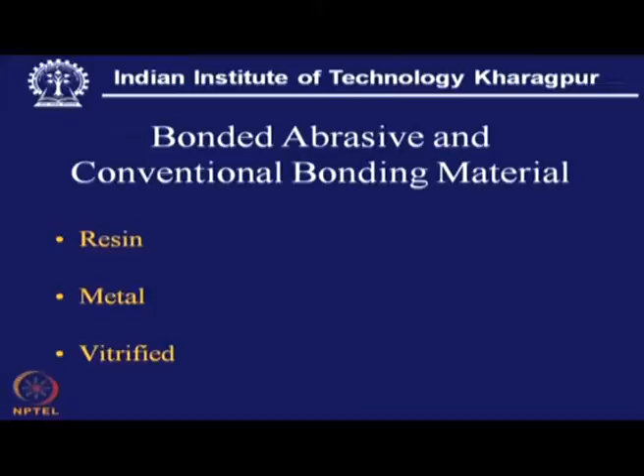The basic requirement comes from the application of this abrasive in manufacturing. These abrasives are actually bonded abrasives, held against a metal support with some bonding agent, required so that the abrasive material can be very efficient and high performing.

Classically, these abrasive grains, in order to take on the task of material removal, are suitably bonded by conventional means: metal bond, resin bond, or vitreous bond. These are actually very old ways of realizing an abrasive tool.

However, the limitations of conventional bonds were soon realized. To make this wheel, we need a mold, and this molding gives the shape of the form, followed by what we call curing, sintering, or firing, depending on whether the bond is resinoid, metal, or vitreous.

When we have to use a mold, we have no other option, so flexibility becomes rather small. This flexibility can be understood in terms of geometrical flexibility on the wheel surface—any form on the wheel surface cannot be easily realized by this molding process. So shape and size are restricted by this technique.

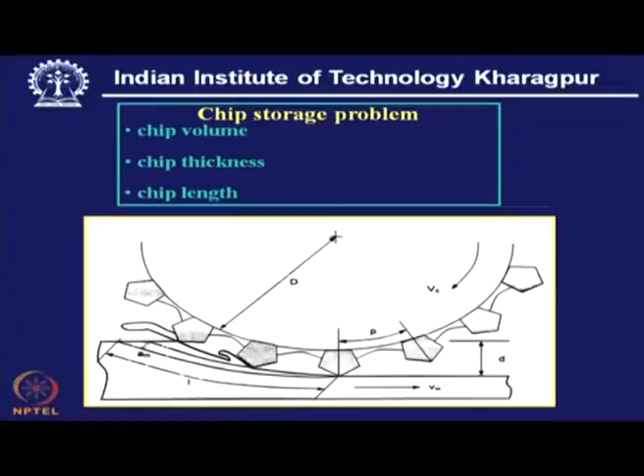However, to overcome this difficulty, one can go for a monolayer abrasive tool, which offers a solution to the aforesaid problems just highlighted.

There are two ways of doing this: either electroplating technology or active brazing technology. By adopting one of these, either plating or brazing, one can realize this abrasive tool with a monolayer configuration. Each has its own merit and weakness.

If we look at this process of making the wheel, one can see that these grits are actually anchored on the wheel surface, which is a metal capable of working at very high speed.

This material is chosen such that its capability to withstand centrifugal tension or stress is quite high, almost like a material chosen for the high speed rotor of a turbine, and this material can be well suited to make even the abrasive wheel rotor.

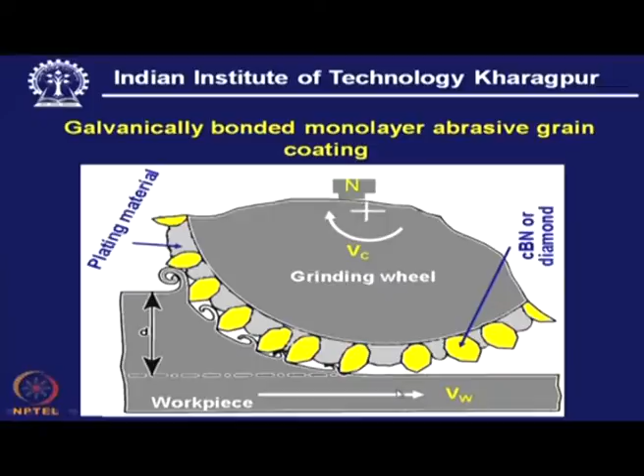Over this we have this bonding layer, and in the bonding layer these grits are anchored—just like a galvanic or electroplated bond around each crystal. We can also look at the brazed version, where the material is brazed over the surface.

However, though it has some salient features and very special advantages unmatched by any other technology, it is still not free of limitations. One of these limitations we can immediately see is the relatively high processing temperature.

Now, this high processing temperature means if the size of the wheel is quite large and has some non-symmetry in its geometry, then holding the accuracy and precision of the geometry by the post brazing process, or even during brazing, will not be a very easy task. The whole brazing cycle has to be controlled with utmost care, but still geometrical distortion at the level of a few tenths of a micron cannot be ruled out.

So, this is going to be one of the major issues which has to be addressed. And relative high processing temperature means there can be a little bit of metallurgical damage to the wheel base, that means the core material, which also needs proper rectification, that means grain refinement or some post brazing treatment. So, this is just not free of any problem.

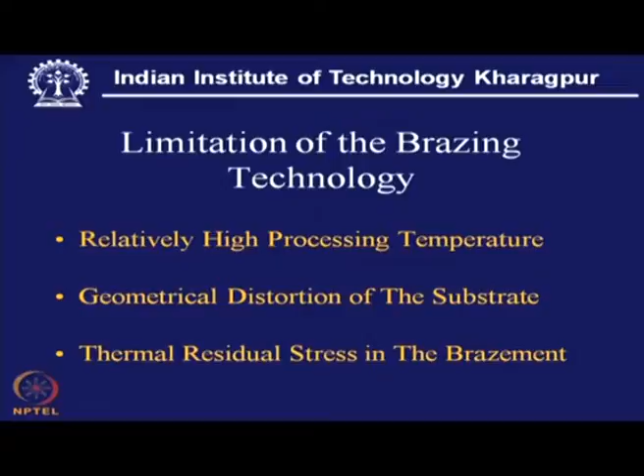And then, most importantly, the thermal residual stress - this is a very important issue one has to care for. It can be illustrated by this simple sketch. This is one grit, this is the second one, and they are being supported by the substrate material, and here we have the braze alloy.

And this braze alloy, by effective wetting, will give this shape. So, that is one of the special features of brazing. This area will be shrouded, covered by the braze alloy, and here this part is exposed. Now, what happens during cooling of this brazing alloy?

This is the grit, this is the braze alloy, and this is the substrate. Now, during cooling, the braze alloy, because of its high thermal conductivity and thermal coefficient of expansion, will cool at a faster rate, and the contraction will be larger in comparison to that of the grit material, which can be diamond or CBN.

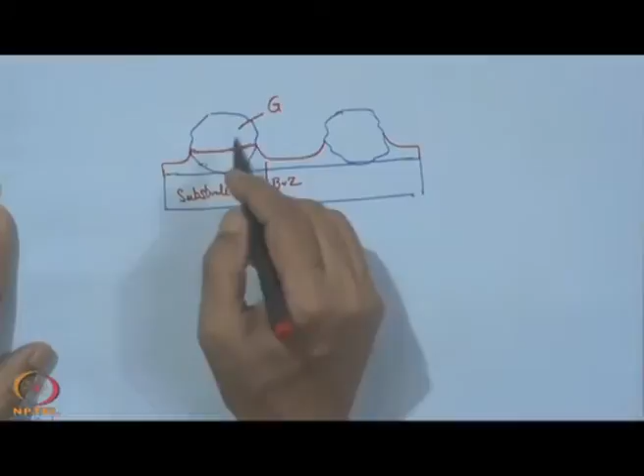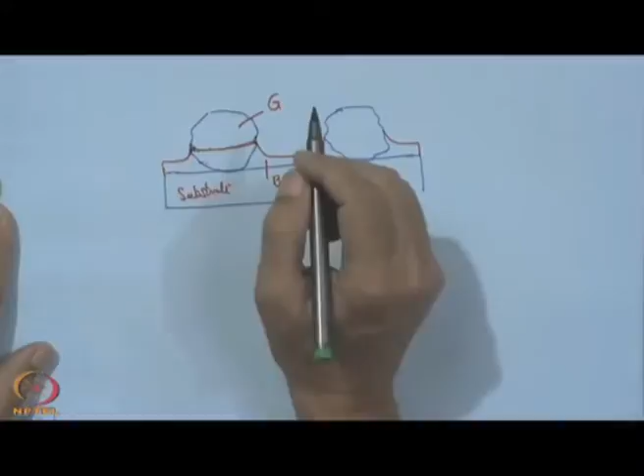And what happens - exactly this material which is covered by the braze alloy will be under compression because of this contraction. However, the portion above that will be free, and as a result one may find some kind of crack here, and this will lead to a disastrous failure. When some prevalent force is acting, this part of the grit will simply be separated. So, it is not a question of bonding or adhesion problem, but it is just like a cohesion problem because of the thermal stress.

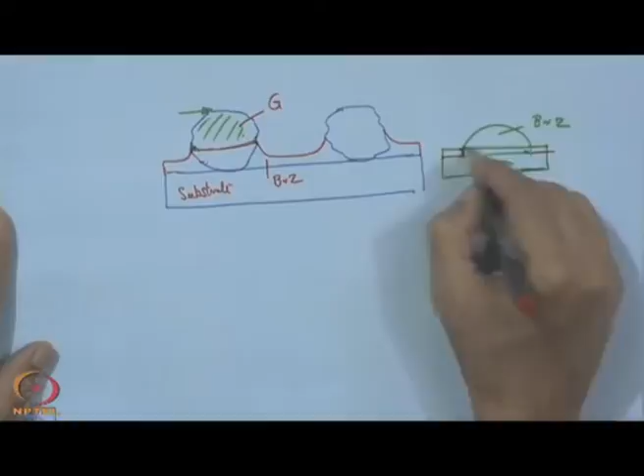This can also be illustrated by another example. So, if this is the braze alloy and this is the ceramic, then also we see that when it is under solidification process - that means after melting it is being solidified - in that case also the portion of the ceramic within this zone will be under compression. However, this part will be under tension, it is free, this part and this part. As a result we may also find a crack. So, this crack and this crack are very similar in nature.

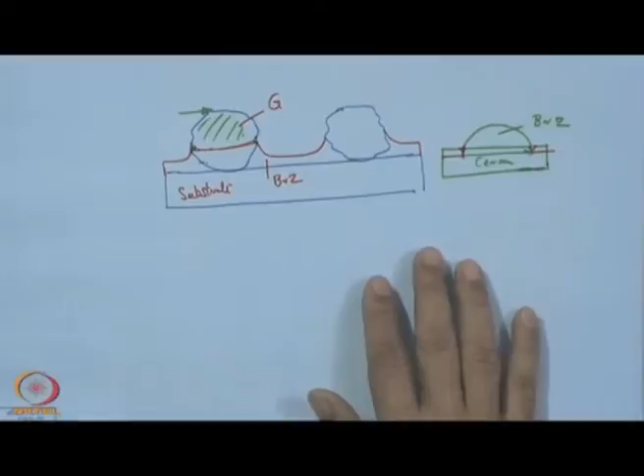Now, why has this been raised? Simply because this is one of the major weaknesses of brazing, and electroplating comes as a rescue, or comes as a solution to this problem. So, naturally, one can find out that this low temperature electroplating is one of the greatest strengths or greatest advantages of this electroplating technique.

So, this electroplating technique will be used just for anchoring the abrasive grain, and here comes the question - which type of grain, what should be used as the cutting tool for making this abrasive tool. So, what are those cutting points, what is the material of this cutting point which is best suited for this abrasive tool application. Now, as we have already seen, this is going to be one layer configuration.

So, it is going to be a one layer configuration, and it is not very similar or identical to a conventional wheel, where you have more or less a composite mass. So, when it is a molding process or molding practice, what we take normally is a mixture, uniformly mixed, this combination of the bond material and the grit material, that forms a composite mass. So, it is a well dispersed mass or structure, but in this case it is a single layer formation.

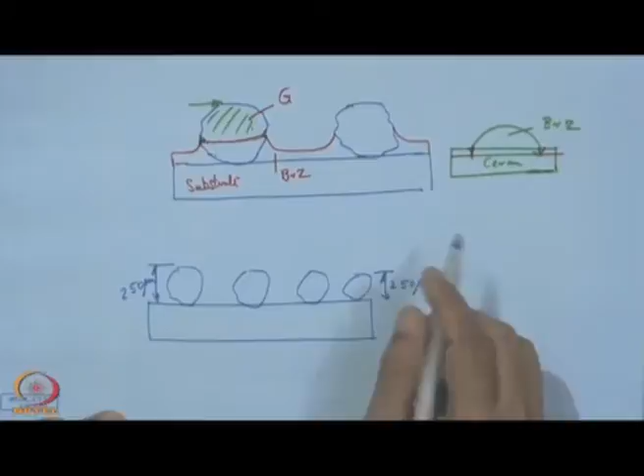It is only one layer. If this grit is 250 micron, quarter of a millimeter in average size, it has to work without fail and adequately to the satisfaction of the user, and over this period a large amount of material has to be removed without damage or fallout of the grit. That is the most important criteria, that this grit should not have any kind of premature dislodgement or breakage, and at the same time we must have adequate surface roughness, surface finish, and accuracy level on the workpiece. So all this we expect from this one layer configuration of the grit, and in that case electroplating will be one of the solutions.

So considering this one layer configuration, one layer arrangement, it is obvious that the grit material with higher grinding ratio should be the obvious choice. That is why aluminum oxide or silicon carbide are not the first choice, rather diamond and cubic boron nitride, that is CBN, these are the materials of choice for this single layer configuration.

And we know that cubic boron nitride is tailored, it is a man-made material tailored for all sorts of high alloy steel, heat treated steel, and very special alloys which otherwise cannot be processed by grinding or machining. Whereas we also know that diamond is remarkable for grinding the non-ferrous family of metal. It is metal matrix composite, metal ceramic composite, or even ceramic as such.

So these are the two members of the super abrasive family, and they can be well used in the single layer tool: CBN and diamond.

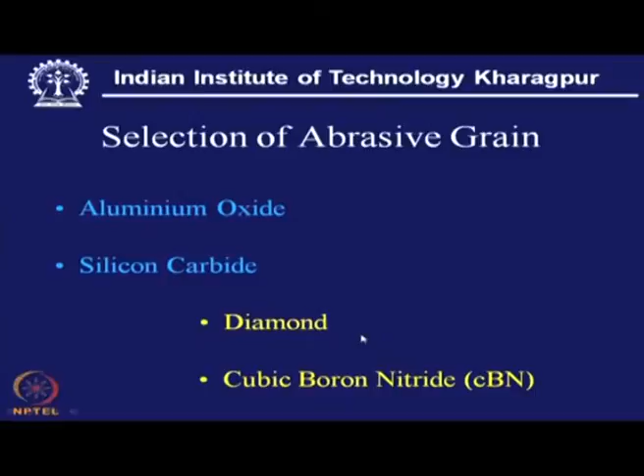So it is the preference of super abrasive in electro deposited metal bond, just as we have discussed this point.

Now, requirement of the abrasive material. One point we should consider is that this material is going to be in the metal bond, and this metal bond is an electro deposited bond. That means this material of the substrate should be electrically conducting, the substrate material, and on that these grits will be placed or positioned or they will rest.

So this is the arrangement one has to make, and then what happens? This will be electrically polarized, and then the metal ion which will be produced during this electrolysis and electrochemical reaction, this ion will be attracted to this side of the substrate, and there they will be neutralized and become metallic in nature, and this metal will build up around the grit.

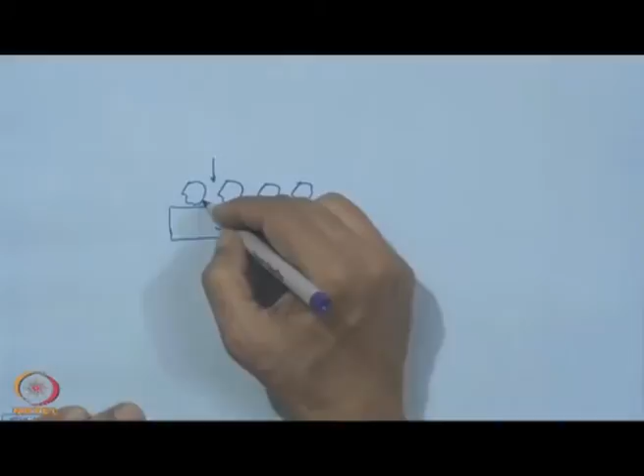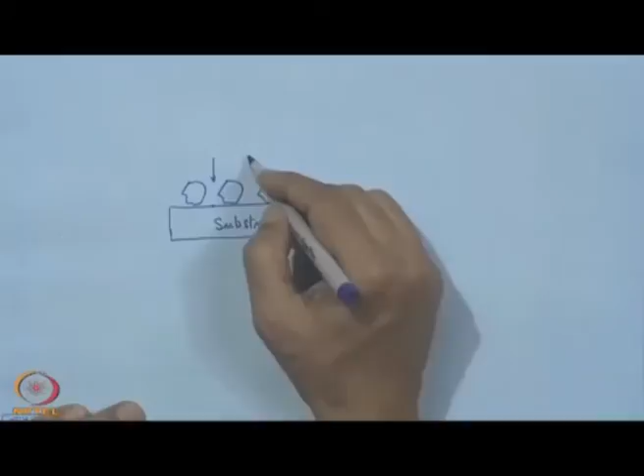And it should be reminded in clear terms, there should not be even a single particle of this electro deposited material that should arrive or deposit, or be collected on the surface of the grit, otherwise the whole purpose of electroplating is lost.

So when we say it is electroplating, it is not exactly electroplating in the conventional term. We know electroplating means here we have a metal, and on this metal we have to put a coating of another material to augment this surface, and that we know.

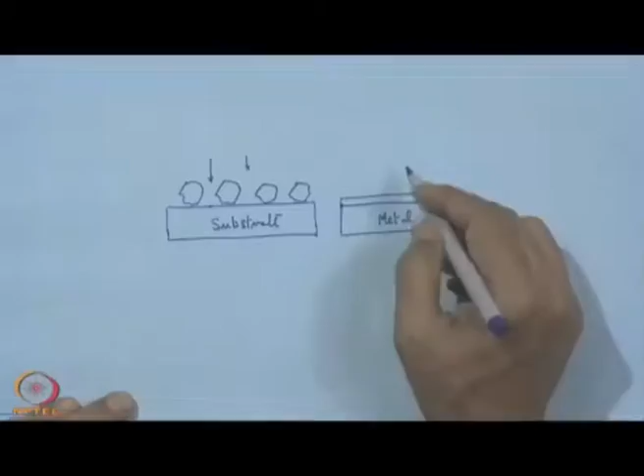And when it is electrically polarized, we have cathode-anode combination, and there is an electrolytic bath, an electrolyte present, which should be a metal salt. Then through this process of electrochemical reaction, finally the metal ion will be collected on this substrate, which should serve as a cathode.

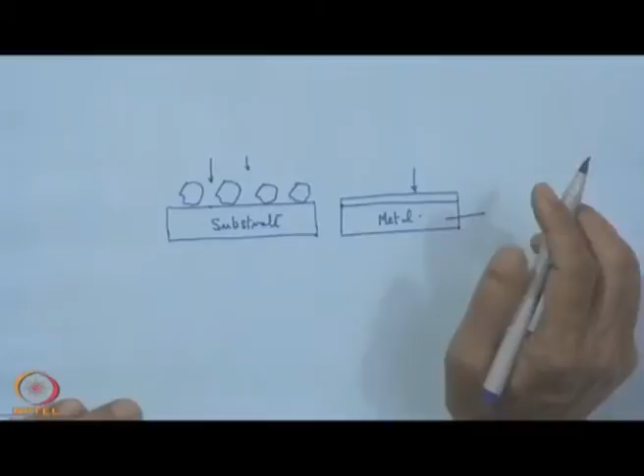So this is direct electroplating, but here electroplating means we have the electroplating in and around the abrasive grits, which are non-conductors of electricity. So one condition that has to be fulfilled, that has to be met, is that this material cannot have any kind of conductivity over their surface.

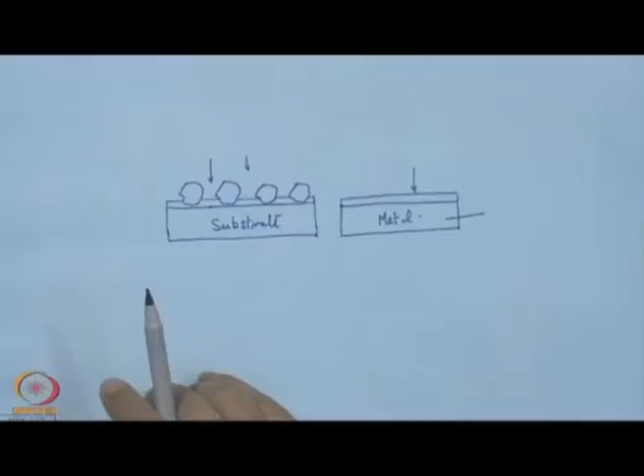However, this may not always happen, and that is one point one should remember. Now this happens because of two reasons. Here we see the super abrasive grit.

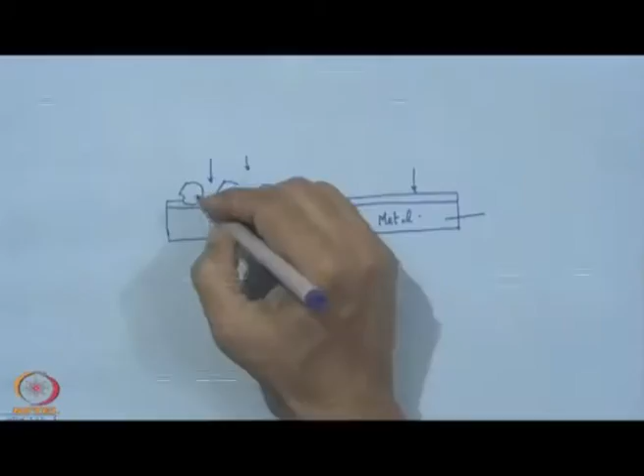Look, this is a natural diamond, it is a mine diamond. From the mine, the non-gem quality diamond is separated, and through this crushing technology they are properly screened and sized, but each grit has a multifaceted appearance. Basically, it is a fractured surface, but there may be some post-crushing polishing process which can slightly smoothen the surface. But basically, when it is crushed, we have a multifaceted surface. By this we mean that we have several cutting points already available on this grit, and at the same time this rough surface helps in anchorage of the grit. If we have this multifaceted surface, then this will help in anchorage of the grit in the bond. So, this is natural diamond.

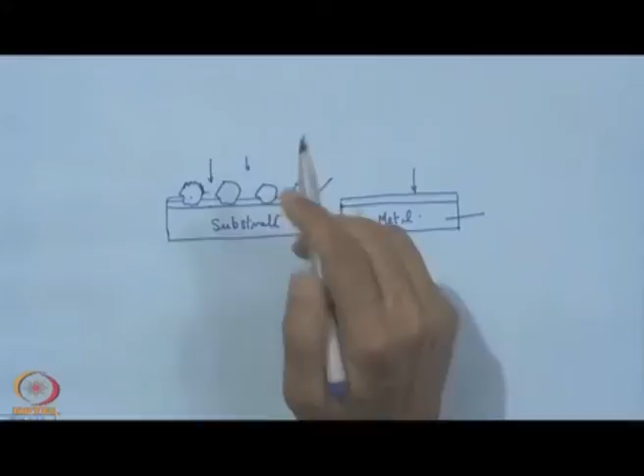One requirement is that there should not be any electrical conductivity, number 1, and number 2, if we can have a rough surface, that will always be to our advantage, enhancing the anchorage of this electro-deposited metal on the surface of the abrasive. But at the same time, we also see this man-made blocky single crystal. It is perfectly grown, it is used for very difficult tasks. When this difficult grinding task is assigned to this wheel, then we have to have such kind of crystal.

However, in this case we have a twofold problem. Number 1 is that during the growth of this diamond, when it is undergoing the synthesis process, we use many metals as the catalyzer, like cobalt, nickel and many more. And if, in an unfortunate eventuality, some of this catalyzer, like a solvent, remains on the surface and is not removed and it is overlooked, then that can become a path or the source of conductivity.

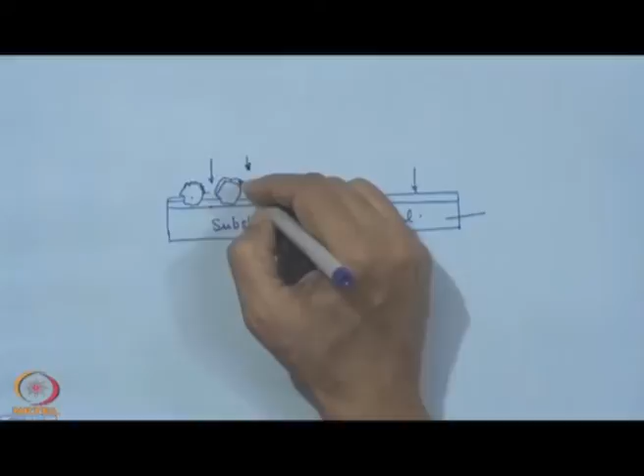And if this conducting path is created when this is placed on the substrate, then there is every risk that this metal, which is not supposed to sit on this surface, will deposit over it, and in certain extreme situations it can cover wholly or partly the grit, causing a heavy metal deposit. Ideally, metal deposit should be only in the space between the grits and not on the grit.

So, in this case what has to be done? A special treatment is necessary. It is actually removing those metals which remain on the surface of the diamond during the process of synthesis, and that has to be etched out, and this etching process becomes part of the preparatory step to tailor these crystals for electro-deposited anchoring.

There can be another way of doing this, that there are certain processes practiced in industry. That means these crystals are coated with a non-conducting coating like a plastic coating, and then the so-called conducting grit may lose its conductivity, and without any difficulty that can be used for anchoring on this surface.

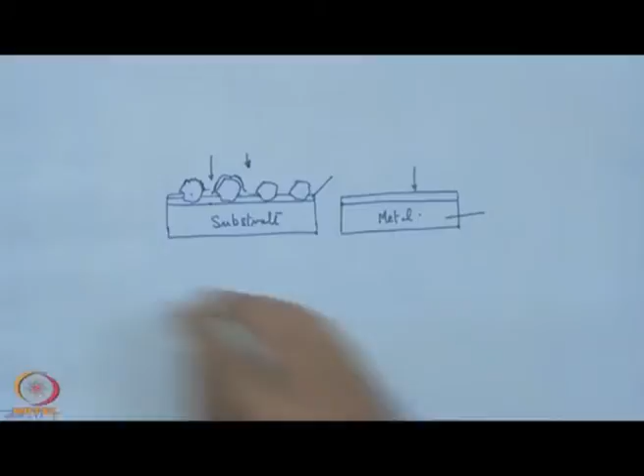However, the surface is smooth, as we see, it is a perfectly grown crystal. One thing we can see here, that it is a mechanical anchorage. So mechanical anchorage means surface roughness plays a key role in augmenting the mechanical anchorage, and this mechanical anchorage becomes automatic when we have a multifaceted appearance, but just this is not possible because it is a well grown crystal with well defined crystallographic planes.

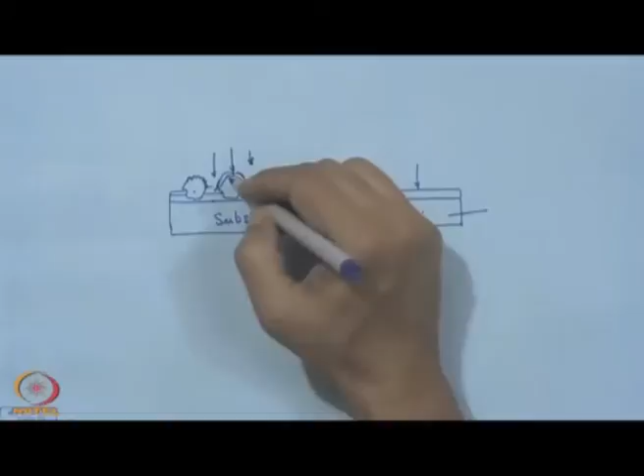So, in this case we must adopt certain processes, methods, technology, on how to roughen this surface. It can be thermal etching in presence of oxygen, or it can be some chemical etching, only to create some pitting, micro pits, micro voids over this surface, so it can have better anchorage. So we find that though synthetic crystal has many advantages, its use or selection cannot be obvious, and utmost care has to be taken so that this can be well anchored in the bond, and at the same time there is no material deposit on this crystal surface because of some inherent conductivity due to the presence of the catalytic agents used during the synthesis of diamond.

Now, when we look at this cubic boron nitride, here also we have two types of crystal: monocrystalline and microcrystalline. The monocrystalline black variety is very strong. Here boron percentage is little more than that of nitrogen, and here it is amber color, where nitrogen is a little more in concentration than boron. However, the most important one is this microcrystalline, which has better average toughness than the other one. But most important here is whether we have excess boron on the surface of this crystal.

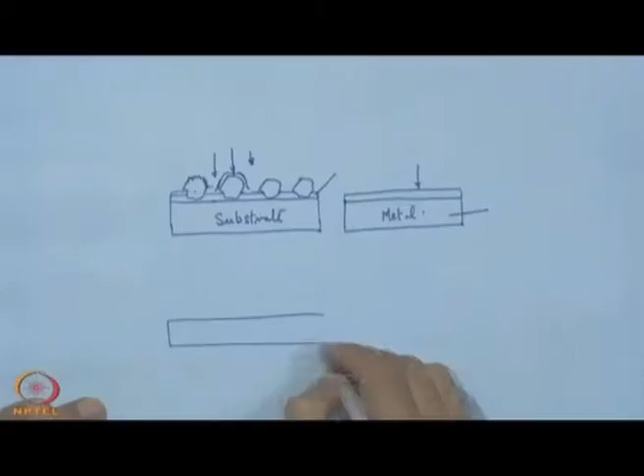So on this surface if we place this CBN particle, and if it has excess boron, then that could become problematic, because this excess surface boron can lead to electrical conductivity, and in that case deposition of galvanic metal from this electrolyte cannot be ruled out.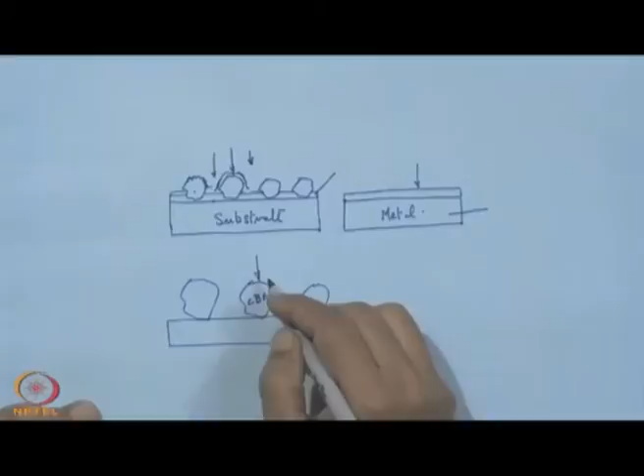So what is to be done, and what is done also on the industrial scale, is that if we find excess boron on the surface, something has to be done for chemical etching of this boron, and with that we can also get a bit of micro grooves or voids over this surface. This is good in both ways: one, the boron is totally removed so surface conductivity is absent, and when you have this micro pitting, that can also help enhance mechanical anchorage on the grit surface.

So this is the way one should consider the various aspects, particularly the electrical conductivity of the grit material, and also whether the surface is roughened or smooth, and whether it requires thermal etching or chemical etching for roughening the surface.

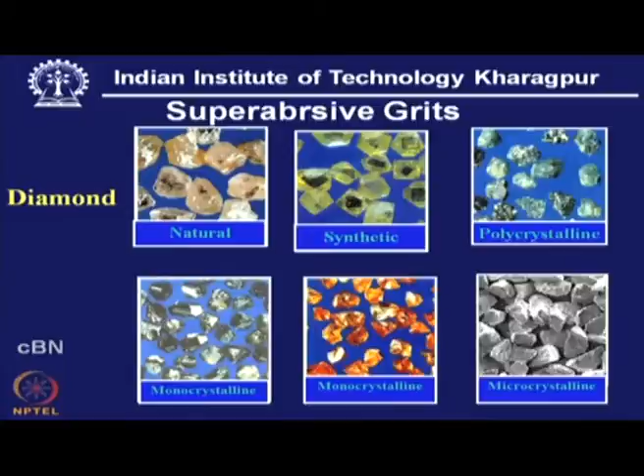Apart from that, what is also necessary, not from the requirement of plating or anchoring but from the requirement of grinding, is the ability of this crystal to break down in a controlled manner, that means auto sharpening, so that the crystal always retains its sharpness, whether at the very early stage of grinding or at the terminal stage, the grit should always maintain the same level of sharpness and grinding capability.

So that one layer can keep the same grinding behavior from beginning to end. This is not just a requirement for grit used in composite wheels, where resharpening of the grit is possible, but in this case with a single layer configuration, resharpening of the grit is not easy, and this single layer configuration will keep on providing grinding results that are more or less uniform throughout the grinding span.

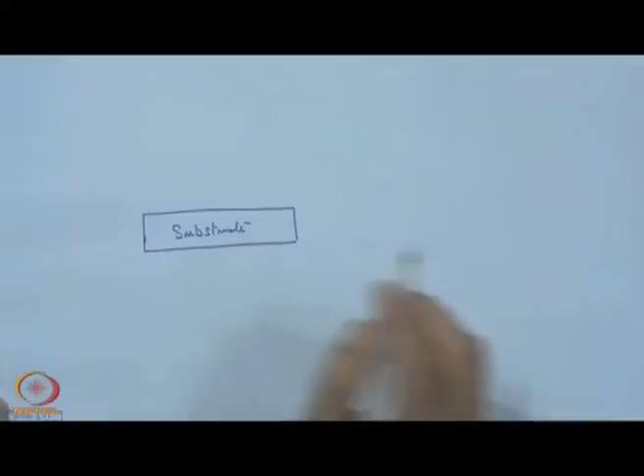Now, requirement on the substrate material - this is also a very important issue. As we know, on the substrate what we like to have is the deposition of the galvanic material. So this substrate should also be electrically conducting, and this bond is not just chemical in nature.

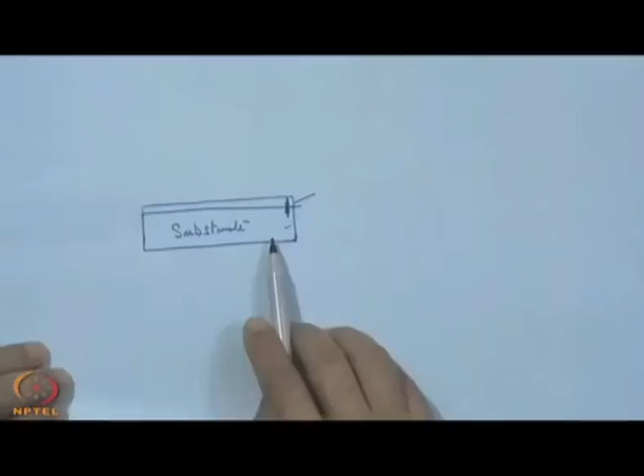So what is necessary is that cleanliness and virginity of the surface is very important, and it should be free of any oxidation - there should not be any oxide layer on the surface. At the same time, the material of choice should be tough, able to absorb alternating stress, and should not collapse at high frequency alternating stress, while the material to be deposited should have good adhesion with this substrate material. So when we apprehend that this surface can be contaminated by oxide, we should take appropriate care of removing this oxide layer, and only after that does the material surface become compatible with the grit material or the bonding material.

Now, steel is a normal choice for making such abrasive wheels, but at the same time hard metal - that means tungsten carbide plus cobalt - is also used as one of the materials for the substrate, on which this galvanic material can be deposited, and it must have very good adhesion so that these crystals can be anchored.

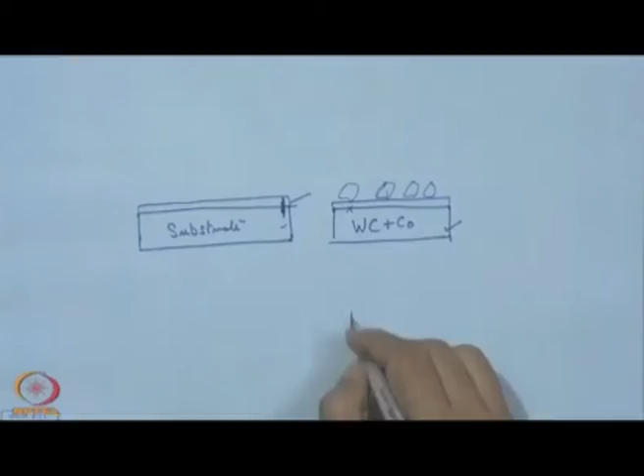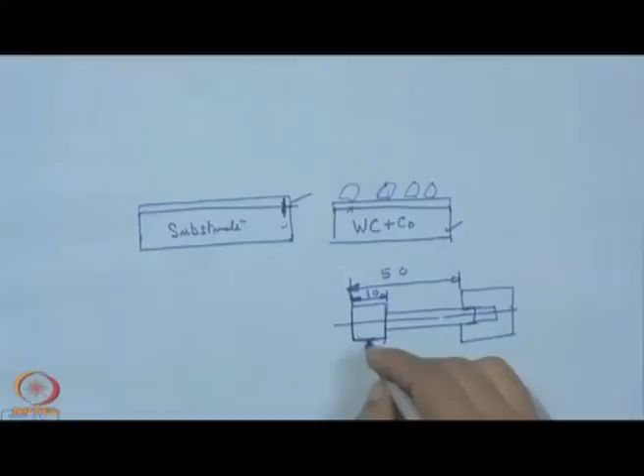Now, why is this tungsten carbide cobalt becoming so interesting for engineering applications? We understand that if such a tool is used as a rotary tool, say for internal grinding or internal abrasive machining on a bore, then this wheel, which is shaft-like, will be held in a collet on the machine spindle, with an overhang of about 40 to 50 millimeters, and this may be 10 millimeters, that is the width of the working surface. Now during thrust force application, during this grinding action, there will be a force at right angle to this working surface of the material.

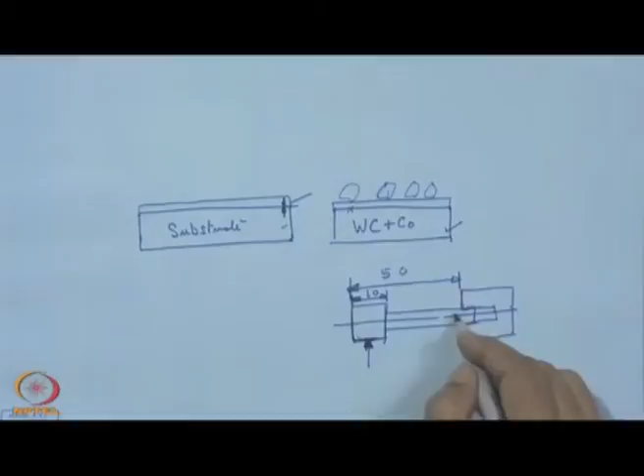Now in this case, what is going to happen? There will be some elastic deformation of this wheel surface, and if we have a better E value, Young's modulus, then obviously deflection can be reduced.

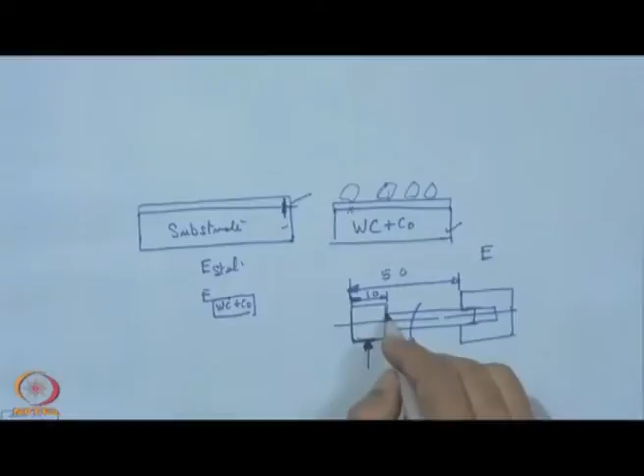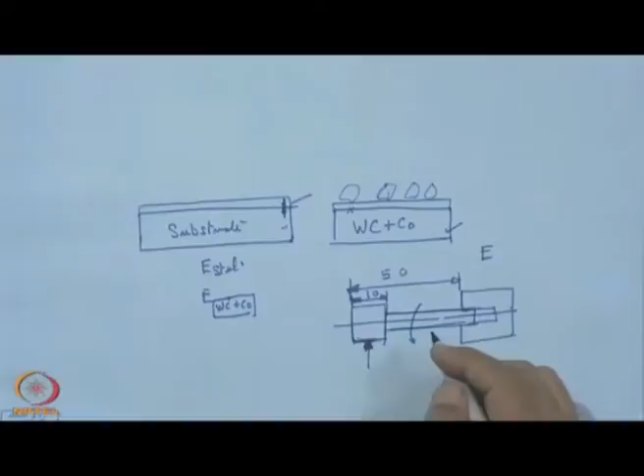So if we consider the E value of steel and the E value of tungsten carbide cobalt, it will be at least 3 times that of steel. So under the same level of force, if we have a tungsten carbide cobalt matrix shaft and a normal steel shaft, with the same level of grinding force, we expect one-third of the deflection, and that will be a good contributor in holding the precision or accuracy of the

tolerance or dimension of the piece being ground or processed by this abrasive tool. So, requirement of the substrate material: one should be its strength and fatigue resistance, and at the same time its adhesion with the galvanic metal which is being deposited, and at the same time a high value of Young's modulus, meaning the material should be rigid.

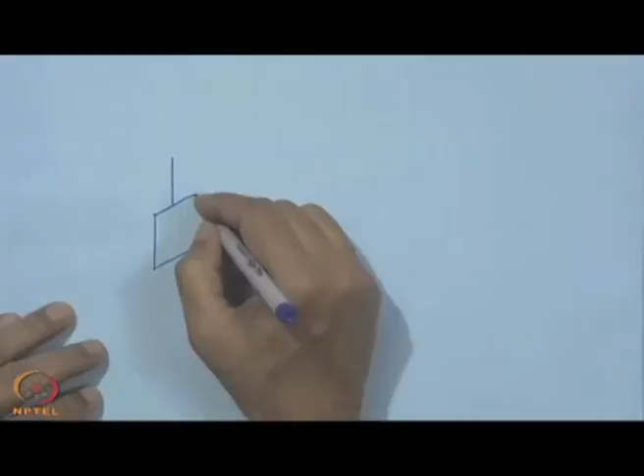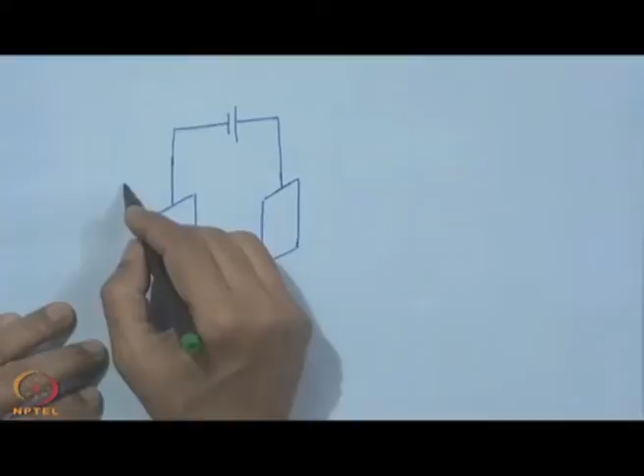Now, the principle of electroplating - we can have a quick look at this. So what is going to happen here? Actually, we have one plate which is going to serve as the cathode, and another plate which is going to serve as anode. So they are properly polarized, and these are put inside an electroplating bath.

So this is cathode and this is anode. Metal will be deposited on this cathode by the following reaction: metal ion plus electron gives the neutral metal, which goes to this side. During this process the solution becomes deficient in that metal, but this is continuously replenished by continuous erosion of the anode, which is of the same metal as that in its salt solution.

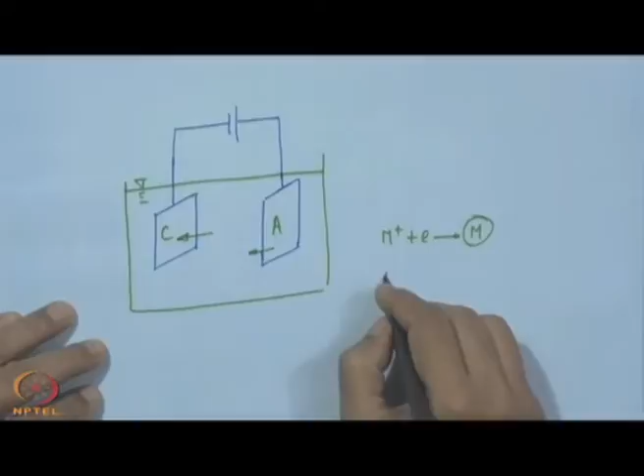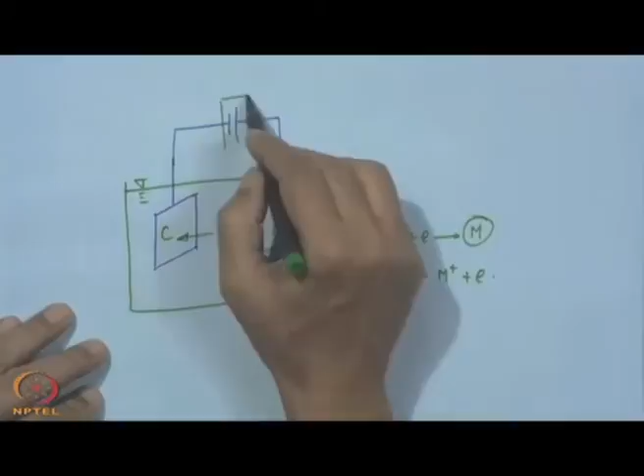So here it will be metal ion plus electron. There will be an anodic reaction, that means electrochemical dissolution, and here it will be electrochemical deposition. This way the process keeps going, and the power source, current density, and concentration of the electrolyte are the process variables which control the growth rate or deposition rate of the material.

Now this is going to be used for realization of the electroplated abrasive tool, wherein the crystals are anchored over a metal or hard metal substrate by depositing this galvanic material around each crystal. So there are actually two steps. The first step is called the tack down step, and this can be illustrated this way.

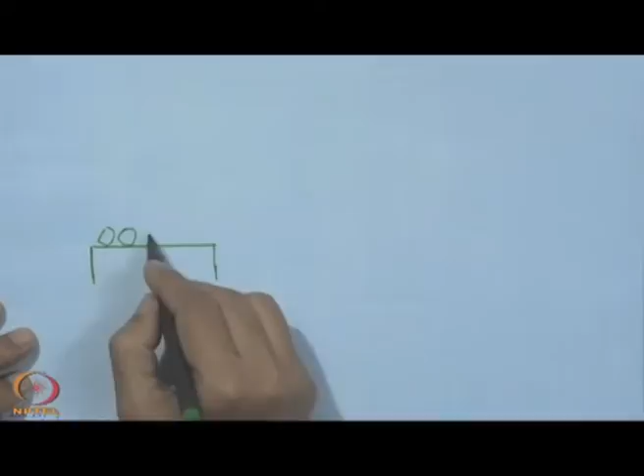If we consider one of the simplest cases, it is a flat surface placed horizontally. It can also be a vertical cylindrical surface. What we see here will be the crystals of the abrasive, and this is going to be a diamond bed. That means there will be a container having pores - it is almost like a strainer - and over that we have one electroplating bath, which is submerged in this abrasive bed, where you have high concentration of this abrasive material.

And then this substrate will act like the cathode, and we can have another plate which will be the anode. So what is going to happen in this case is that this material, with this electrolytic solution, is going to deposit on this surface. So here what we see is just one cathode, and this is going to be the anode plate, and that is the cathode substrate.

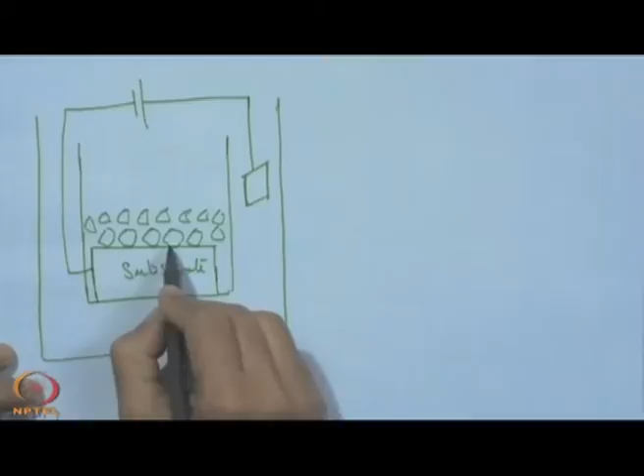And here what is going to happen is that the layer of grit which is touching the top surface of the substrate - around that, wherever we have space, there will begin the deposition of this electroplated material or galvanic material, like this.

So we have large grit, maybe on the order of say 250 micron, or 125 micron, or 90 micron. These are the standard sizes used, or it can even be lower, but the standard sizes used for grinding are 250, 125, 100 or around 90 micron. Those are placed, and through these capillary openings and spaces there will be continuous deposition of the material.

And when we find that the layer thickness is just sufficient to hold the grit, just holding them in position, it is not at all good adhesion. Just by a finger touch or a little push, we can remove these crystals. This is what we call the tack down step, only to position these grits in place - meaning on the substrate surface these grits are held. This is the tack down plating tank, and after this it has to go to real plating.

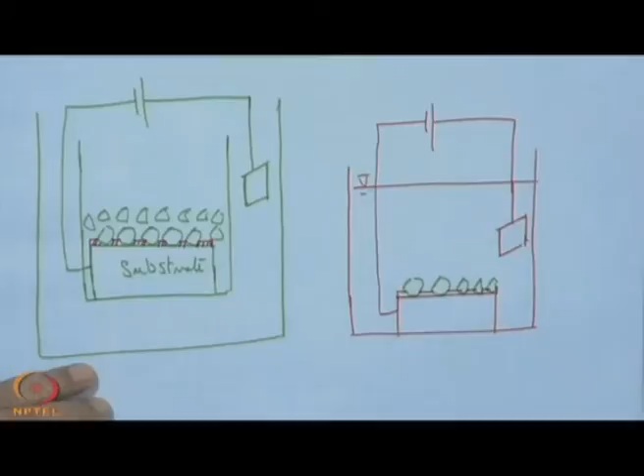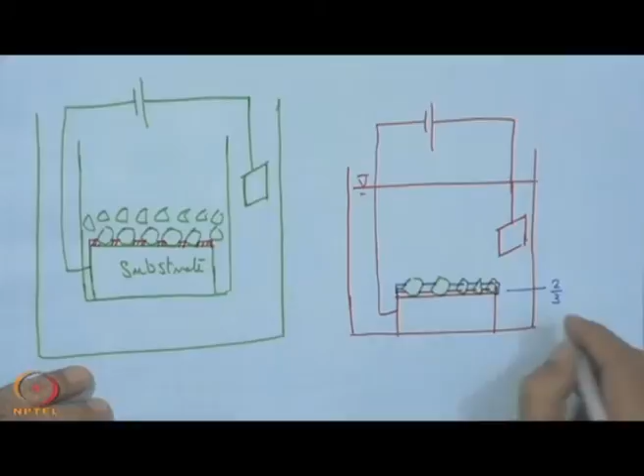And now, over that, with this cathode-anode action, we have heavy metal deposition over this surface, and that will be built up over this. So, this is actually the actual plating, and it will grow, and it can grow, and it depends upon the level to which it has to be covered, say maybe it is two-thirds of the grit height, or between 60 to 70% of the crystal height that we can cover.

So, from this concept of wedge, if we consider these grits as the wedge, we can see at least more than 50% need to be covered to have proper wedge action. So, it should be obviously around 60-70% of the crystal that is covered.

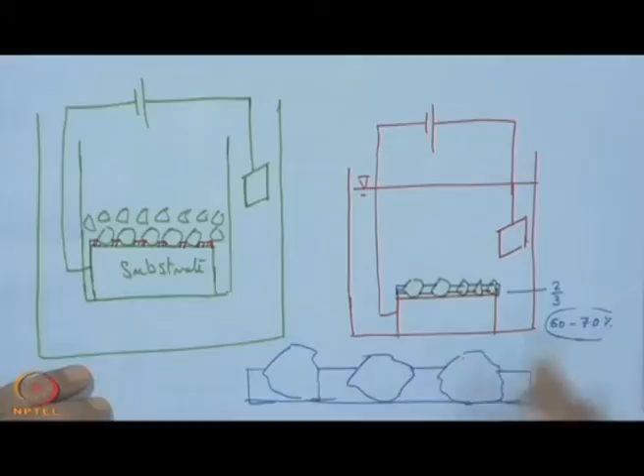So, it is just now a question of how much energy is supplied, the concentration of this metal salt in this solution, and it is just a question of time how this material will build up.

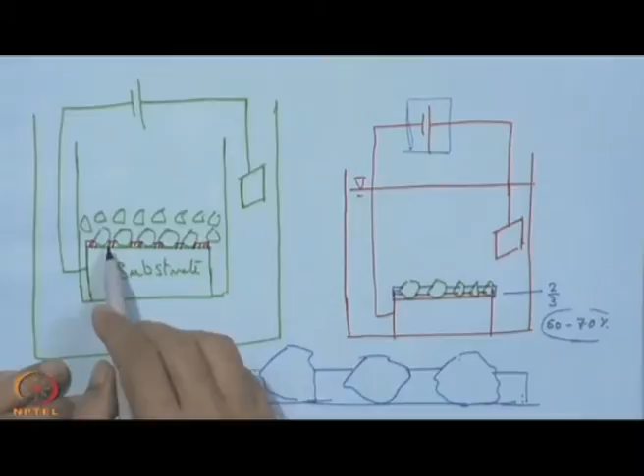But in this case we have one problem that cannot be just overlooked or ruled out, that means evolution of hydrogen. This hydrogen also evolves, and it is also collected at the cathode because it is an aqueous solution. So, hydrogen will be collected at the cathode, and during this process, instead of a plane surface, we can also have this around the grit.

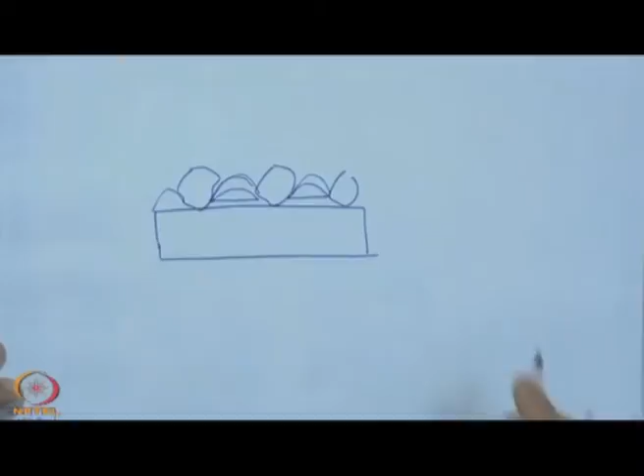Instead of this nice build up of material, it can also be like a nodule formation, and it can go like this. It is also because of hydrogen entrapment, and we have this globular nodule formation.

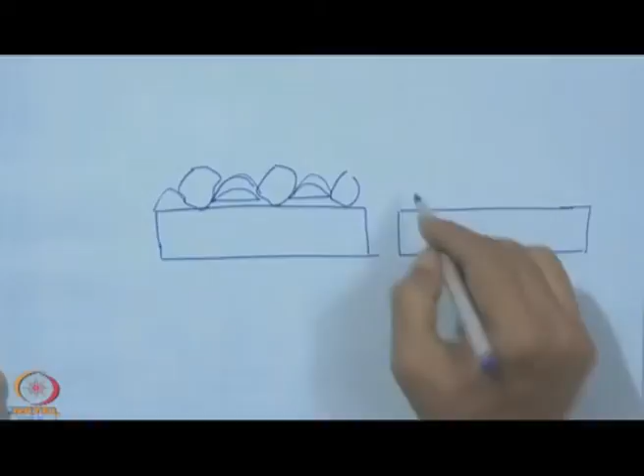This will have a negative influence, in that if these are the crystals, our aim is to hold this crystal with adequate bonding and with maximum available space. But if the growth of the material is like this, like a nodule formation, then it is not going to serve the purpose well, because at the root on the side of the crystal you have little metal, and in the space between the crystals we have a high level of metal.

And it is just not going to serve the purpose of grinding. So, this evolution of hydrogen and entrapment of hydrogen should be properly addressed, how to remove or eliminate this problem.

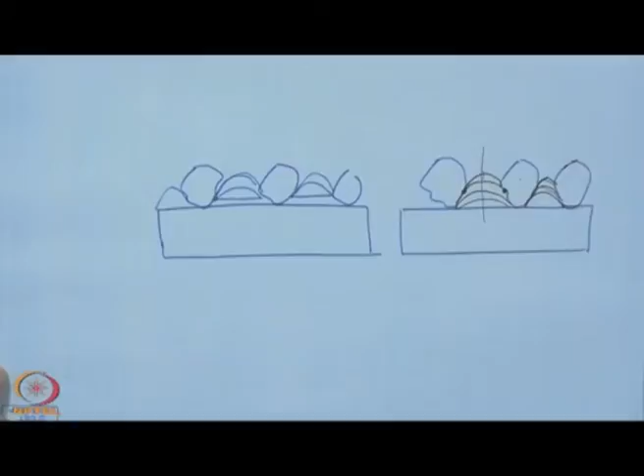So, this is actually the electro deposition step. With that we can grow the metal layer over this surface, and finally the electro deposited layer will be ready for any abrasive action or grinding action.

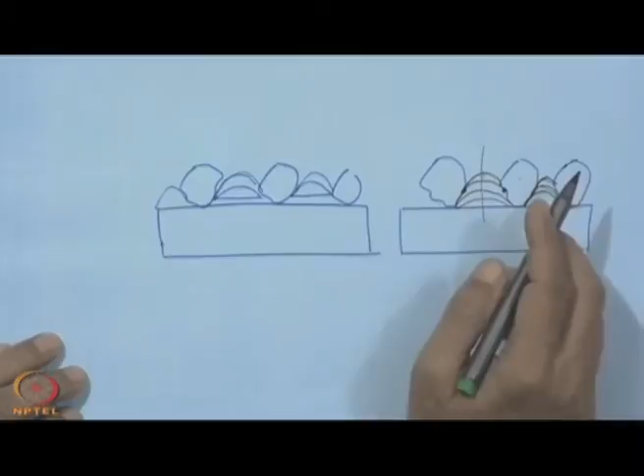So, here actually these are anchored. This is just not a deposition in the classical sense, but it is just the placement of the crystal, and then it is actually the deposition of the galvanic material, and it is holding by proper anchorage.

Now, here what we can do, normally we see that nickel is used as the plating material. So, here we have the grit, and this is the plateable material. The nickel is known for its plateability.

So, this way we can have the nickel build up after this tack down, but there can be another secondary coating, that means it is a multi-layer, a material such as chromium, which is much more oxidation resistant, and its wear resistance is still higher. So, this layer will be nickel followed by a layer of chromium or other material which has good plateability, that can also become a material of choice.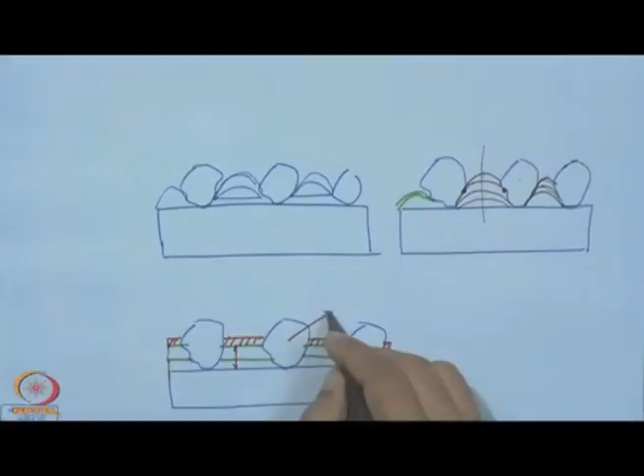So, that will give some kind of wear resistance in this case, because during grinding there can be erosion of this material, and if it is too soft, this material will wear out, leaving no material support, and there can be undesirable fallout of the grit.

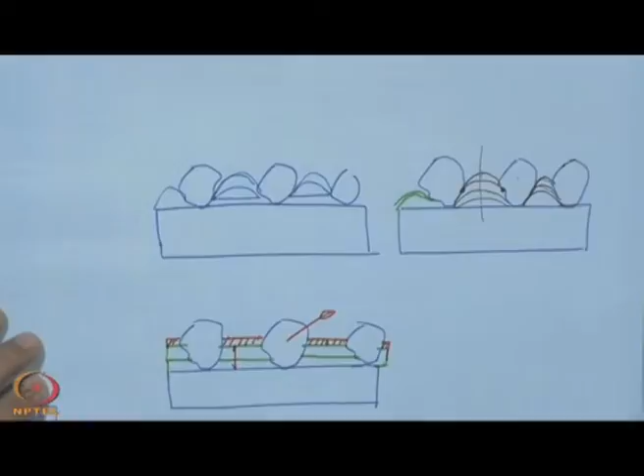So, this kind of galvanic anchorage is suitable for single layer abrasive wheel, for the wheel dressing tool or the wheel truing tool. So, dressing and truing are two important processes, and in that case this dressing tool and truing tool with high quality diamond can be properly bonded. This can be a useful tool not just for grinding, but for rectifying or giving shape to conventional grinding wheels like ceramic wheel, aluminum oxide wheel or silicon carbide wheel.

So, this plating technology can be well adapted for manufacturing grinding wheel or dressing wheel or truing wheel. Now, this can also come as a dispersion of super abrasive grain in electrodeposited metal matrix. That means the whole thing can be covered, so these are the grits with a very high concentration, and we can have a composite coating.

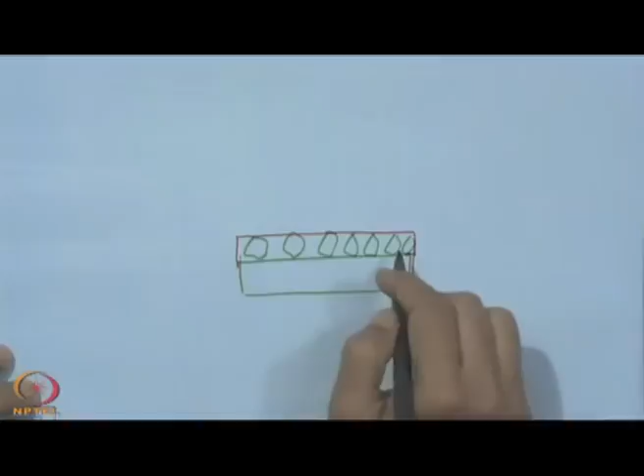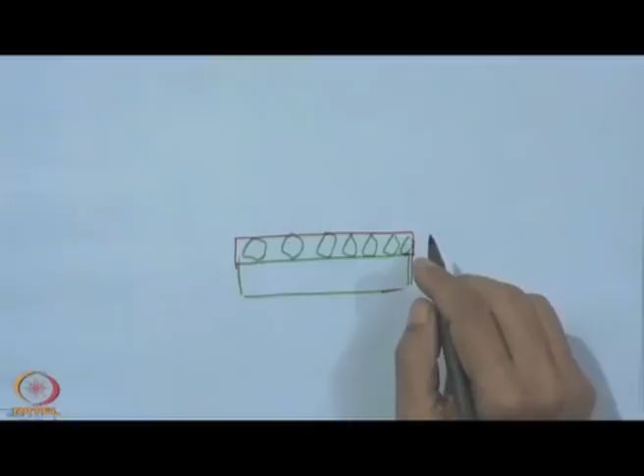That means in this case the coating can go up to this point. So here we have a coating which is composite in nature, meaning we have abrasive grit dispersion with high concentration, well dispersed in a metal matrix. So in this case the grits are not projected, but totally covered. This is the dispersion of super abrasive grain in electrodeposited metal matrix.

Now, this is electrodeposited multilayer, which we have also mentioned, where a chromium coating over a nickel coating can be used for this purpose with a view to enhancing the wear resistance or some tribological property.

Now, reverse plating is important in that it facilitates making or manufacturing of precision abrasive tool. So here we have to have a dummy substrate. The basic principle is like this: in normal electroplating, the grits are placed, and if these crystal heights are not the same, then these peak points are not at the same height, so they cannot have uniform cutting action. So what can be done in this case? We can also use what is called positive plating.

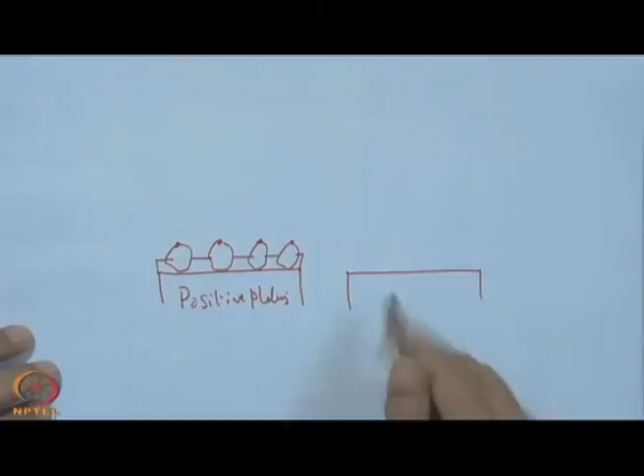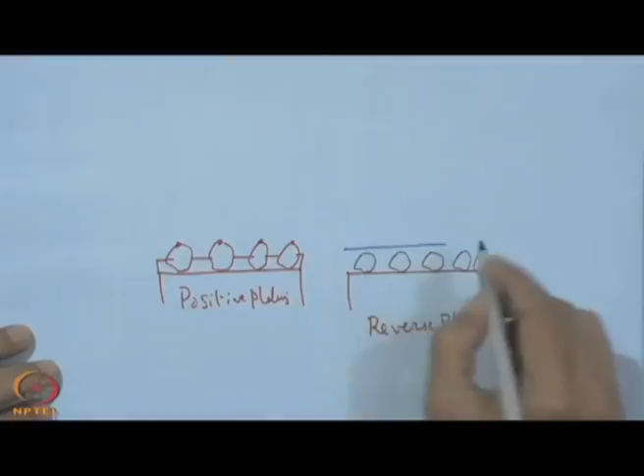So here this is the bond layer and this is actually the abrasive tool, but this is actually the reverse plating. Reverse plating means we have to invest one substrate. So here the crystals are placed, and then the actual substrate is brought from the other side. This is the dummy substrate, and this is the actual substrate. In between, the whole thing will go into the plating tank, and then the entire area will be filled with this galvanic metal layer.

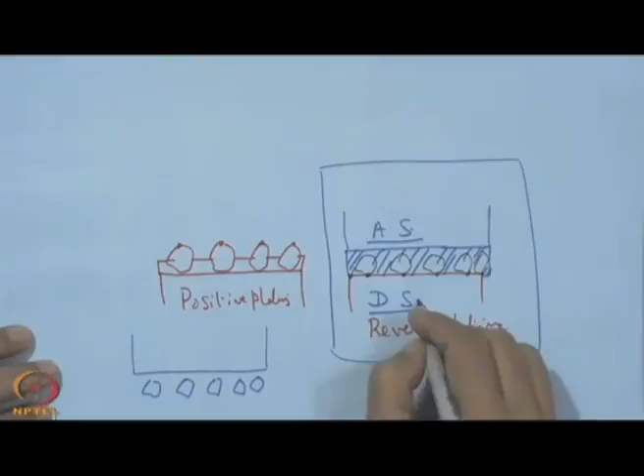Now the whole thing is filled in. After that, this dummy substrate will be chemically etched, so that we get a substrate surface where each point is now on this surface and they are at the same height. So in this case we get this abrasive layer, which at the very beginning was resting on this dummy substrate, but after that the bonding is carried out by initiating this electrochemical deposition, and this electrochemical deposition was continued.

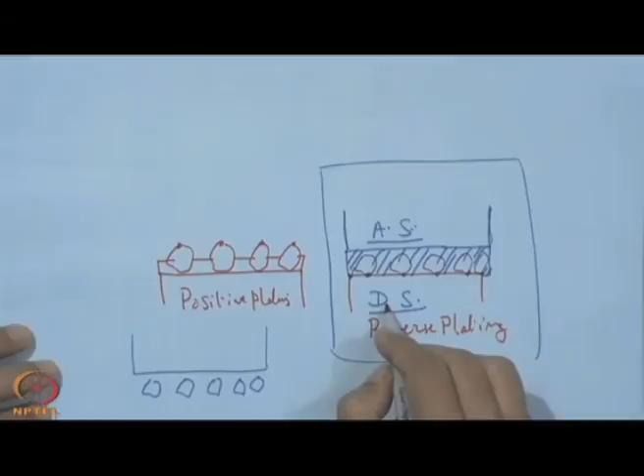So it could cover the entire space between the actual substrate and the dummy substrate. So now the situation is something like this, this is the coverage. What we can do in this case is, these are the crystals which are embedded in this galvanic matrix, and this is the actual substrate.

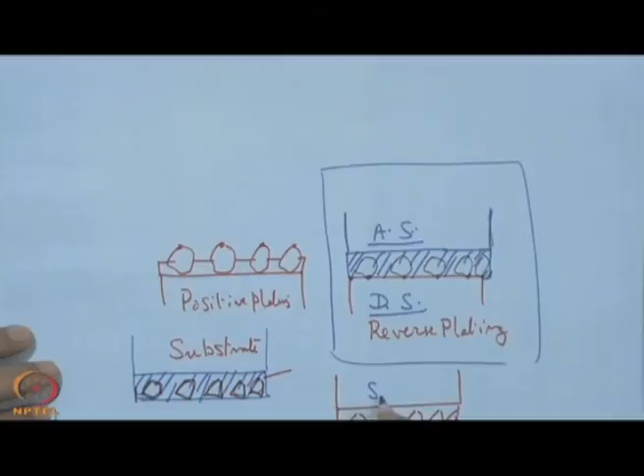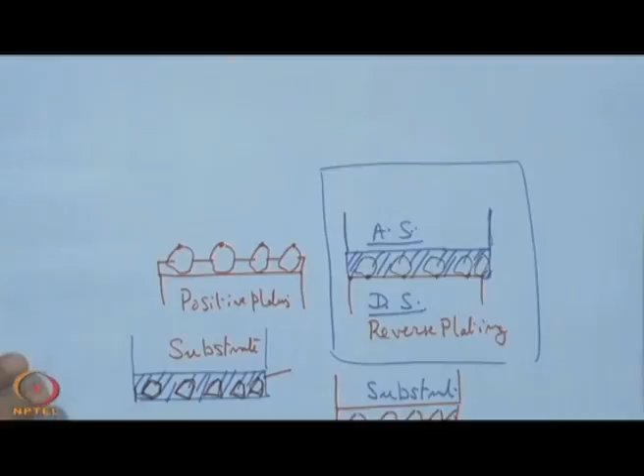So what can be done in addition is that now we can continue etching of this galvanic material, so that finally we get a grit in this form, where the bond material can be held like this, and each point, the peak points, are at the same height with respect to this substrate. Now, with this type of material, you can provide a uniform cut, and this will be most important for making the form truing or the form dressing wheel, which are used to give the form on conventional grinding wheel.

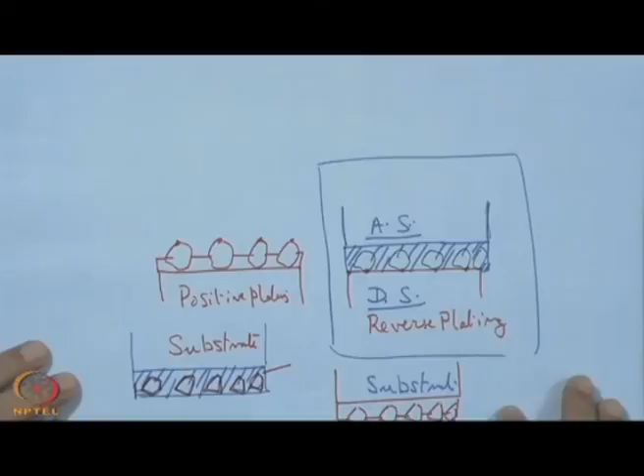So this reverse plating is one of the most precise processes for making precision wheel or giving precision form on the wheel surface. So with that we can make a summary of the discussion like this.